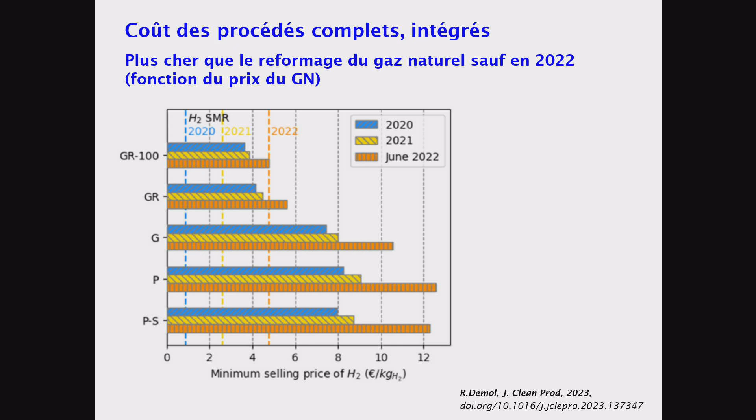Merci pour la présentation. Déjà, sur l'analyse de cycle de vie, vous avez montré le Global Warming Potential, surtout vous avez parlé de ça. Et vous avez une idée pourquoi là, vous avez un effet positif, c'est pour la 5e configuration, c'est ça?

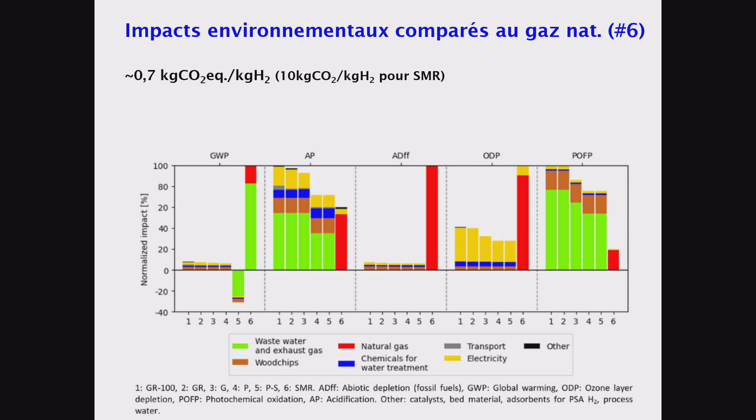Négatif ou positif? Ça dépend de quel point de vue. Donc du coup, c'est surtout l'émission de CO2. Quand vous séquestrez du carbone avec le biochar, parce que vous l'enfouissez, il retourne, il est mis dans un stock, un puits de carbone. Vous pouvez considérer que vous êtes négatif en carbone sur l'ensemble de la chaîne, puisque vous avez moins de carbone qui sort que de carbone qui rentre.

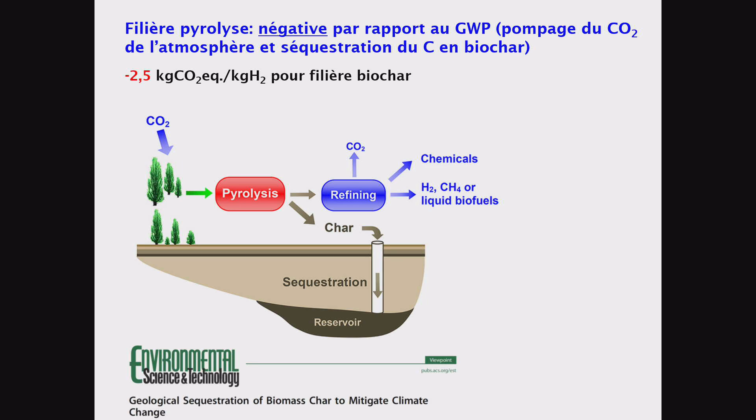Très bien, mais écoutez, merci beaucoup.

Je vais déjà vous remercier pour être présents aujourd'hui avec nous. Je vais avoir le plaisir de vous présenter, avec Mathieu Villani ici présent de chez Khimod, le projet GOHYAVE, qui a pour but de produire de l'hydrogène à partir de déchets.

C'est dans cette direction ou dans l'autre? Très bien. Nerius Invest en quelques mots. Ah oui, là c'est mieux comme ça. Nerius Invest en quelques mots.

Donc notre ambition, c'est de contribuer à la décarbonation du futur, de l'industrie et de la mobilité en particulier. Notre métier, c'est développeur, intégrateur, financeur et constructeur de projets à impact environnemental positif, et en particulier la quasi-totalité de nos projets sont des projets d'énergie renouvelable.

La société est née en 2019 avec des projets en Guyane française. Elle y continue certains de ses projets, elle en développe d'autres en France et à l'international également. On est une quinzaine de personnes.

Vous voyez des petites images en dessous de certains de nos projets en sylviculture innovante, en distribution d'hydrogène, cogénération de biogaz de décharge, et le fameux projet GOHYAVE qui s'inscrit dans la thématique du jour, avec la production d'hydrogène circulaire via pyrolyse, circulaire puisqu'on part de déchets.

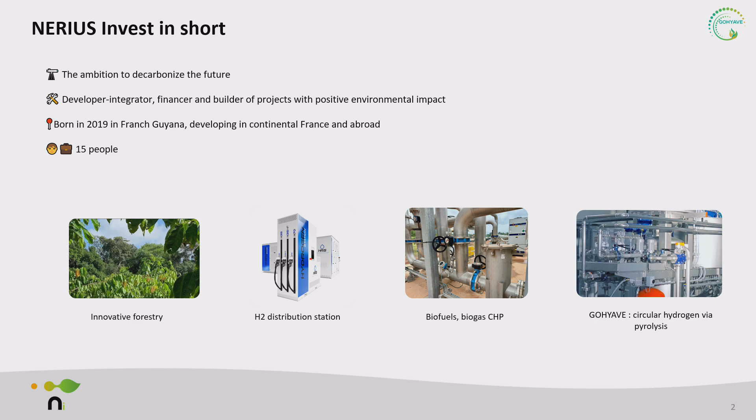La problématique numéro 1 qu'on adresse, c'est la décarbonation de la mobilité. Vous voyez là un graphique du CEA qui montre les prédictions en termes d'usage d'hydrogène pour la mobilité, que ce soit sous forme de molécules pures ou intégrées par la suite dans du SAF par exemple ou d'autres types d'e-carburants. Vous voyez quelques chiffres du marché, et un point intéressant à soulever, c'est que la bulle hydrogène est ce qu'elle est, je pense que les gens dans la salle connaissent un peu le statut.

Aujourd'hui, il reste des usages mobilité, y compris mobilité terrestre, qu'on peut considérer comme hard to abate, et pour lesquels l'hydrogène est une bonne option. La mobilité lourde, intensive, et d'autres types de véhicules, comme des véhicules de chantier, qui ont des besoins en puissance tellement forts, parce qu'ils auront des grues intégrées, plusieurs roues motrices, ça peut dépasser le mégawatt, que l'électrification n'est pas une option. Donc l'hydrogène a encore de l'avenir sur certains marchés de niche.

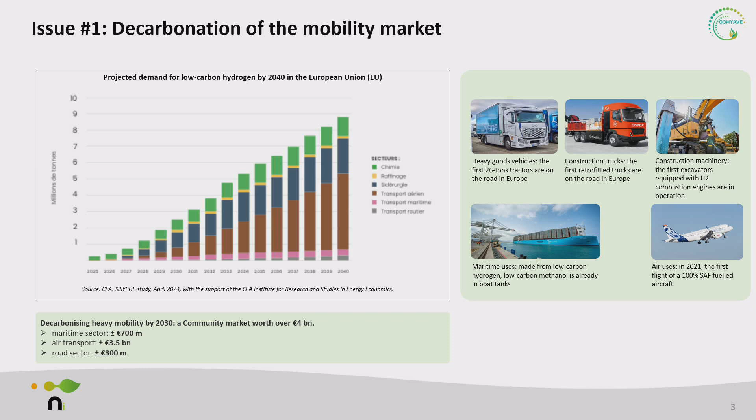La deuxième problématique qu'on adresse, c'est la problématique des déchets. Vous voyez ici l'illustration de plusieurs intrants que l'on vise à terme. Pour l'instant, sur cette première version du projet industriel, on se focalise sur les pneus, qui aujourd'hui sont souvent, comme les autres déchets, envoyés dans des pays à faible niveau de protection environnementale pour être brûlés, par exemple dans les cimenteries. L'idée, c'est de développer un service au territoire et un écosystème local, de faire de l'écologie industrielle territoriale au service du territoire et de valoriser ces déchets.

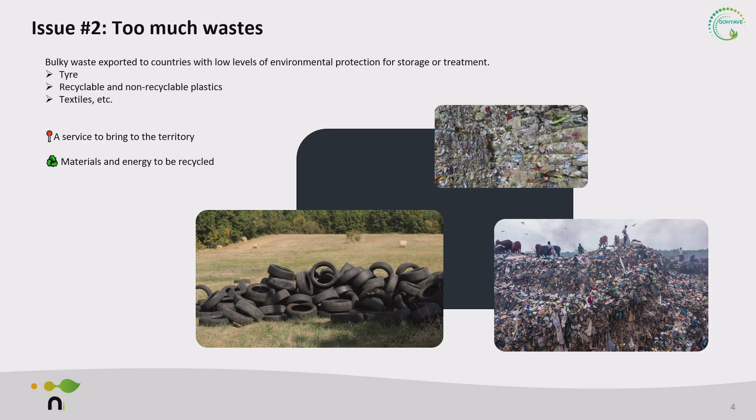La première étape, c'est la préparation de la charge, avec un enjeu sur le déferraillage du pneu, le broyage du pneu, et la granulométrie, parce qu'un écart de granulométrie peut générer un gros écart dans le temps de contact dans le four et donc dans les propriétés du syngas.

Ensuite, on a un bloc de pyrolyse haute température. On ne va pas générer des huiles, on va générer du syngaz, du gaz de synthèse, riche en hydrogène, qui va contenir aussi du CO2, du CO, du méthane, des goudrons, des suies, tous les composés indésirables qui sont inévitables.

Un coproduit, c'est le char ou le carbone black, qui pour l'instant n'a pas le qualificatif de carbone black type raffinerie, c'est du recyclé, mais qui trouve des débouchés dans des secteurs comme le plastique, le rubber, ou l'industrie du verre. Donc qui peut être valorisé en coproduit également.

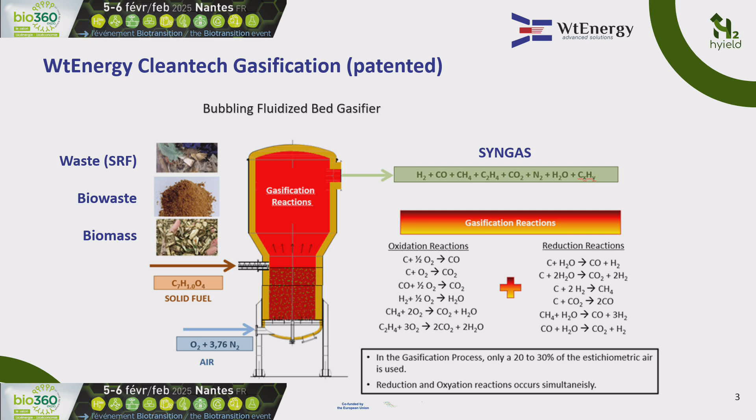We work normally with gasification technology. This is what I'm mentioning here. This is a bubbling fluidized bed gasifier, the air bubbling fluid bed gasifier. Normally we use it for thermal applications. I'm not going to explain too much here, but basically what we do is convert a solid into a gas, and there are so many applications.

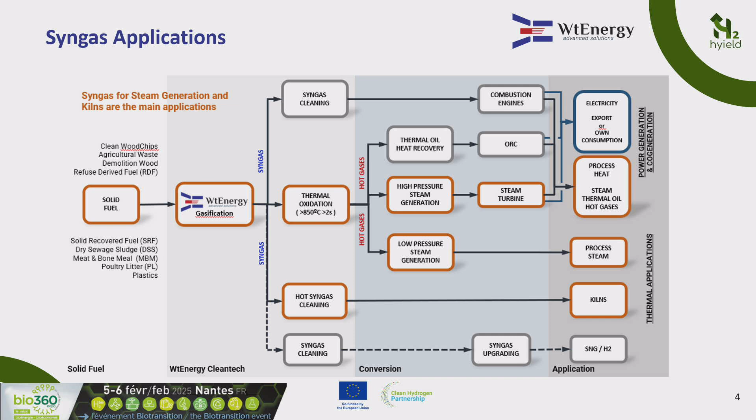And the last line is syngas cleaning, upgrading, and synthetic natural gas and hydrogen, which we are talking about here today. It's dotted lines because we have not really reached a commercial plant. But these are the experiences that we have with syngas for thermal applications and power generation. We already made gasification from wood chips to power generation at small scale, 1 megawatt and 2 megawatt electric. Then we switched to thermal applications, energy savings in industry using bio-waste or waste for steam production.

And the last three plants we have on the top include an 18 megawatt cogeneration plant in Switzerland. Now we're making one here in France, very close to here, 1 hour from here, which is a bio-waste to cogeneration plant also.

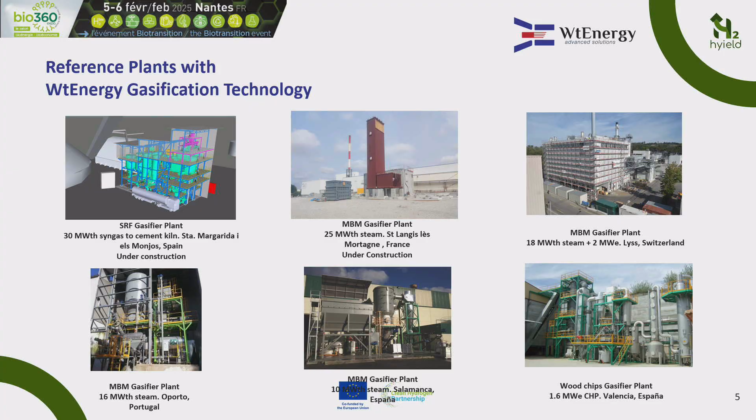And the last plant we see on the left is a cement plant in which we're going to replace 30 megawatt of syngas directly to the kiln. But as mentioned, this is the next step forward, going to green fuels from syngas.

For this, we created a consortium. There are several companies from Spain, France, Norway, and Germany. So we have big players here, okay? They decided to come with us to this project. We have companies like Cemex, which is one of our partners in my company. We have Veolia, H2Site, which is the membrane separator company.

This Horizon project was awarded 1.5 years ago. The target was to make hydrogen from bio-waste. So we adapted our technology in order to achieve that commitment. The big numbers are that we have to produce 400 tons of clean hydrogen. We have a very high efficiency on the conversion. I will explain a little bit why we have this good efficiency.

We have a very good integration of the heat from the processes, and also a very novel solution for the water gas shift and separation to reach a 99.97 purity of hydrogen and have less than €3 per kilogram of cost, considering biomass, which we are paying for, okay?

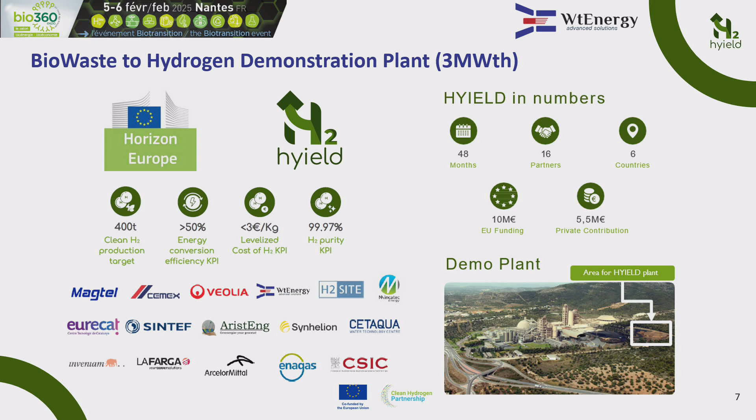It's a funding of 10 million euros. The total project is 15 million euros. We have 16 partners, exactly, from 6 countries. And we have a contribution of 5.5 million from private contribution from our companies.

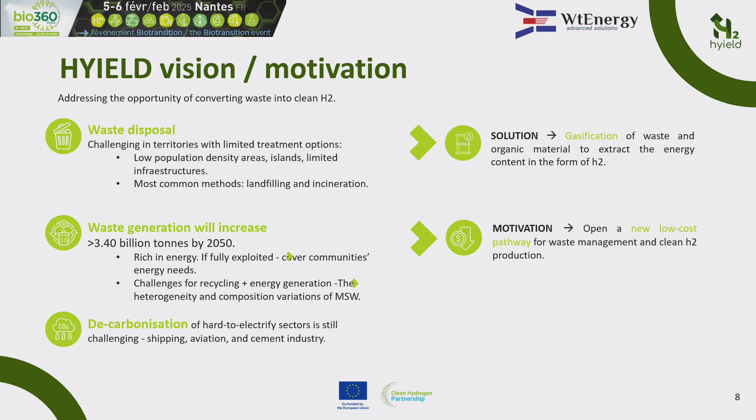The motivation is basically that the waste disposal gives some other alternative to the waste. There's a very high potential, more than 3.4 billion tons by 2050. We have to decarbonize. We are producing this solution. And basically the motivation is to make this low-cost pathway for hydrogen in the industry. I'll come back, sorry.

Yes, okay. Key parts. Feedstock flexibility. We see this as very important. You cannot consider making a project only for wood chips or a very standard material. You don't know what is going to happen in the next 15 years in the biomass or bio-waste market. So we have the flexibility of a very wide range of material with low heating values from 2 to 5 kilowatt hours per kilogram. We also developed the technology to handle complicated materials, high ash content, and complicated ash.

Low cost, this is very important. We have been in the world of gasification since 2003, and we know that if you don't make something that is really cost effective, you have no project. Scalable design: we are running this demonstration plant of 3 megawatt. The target is to have commercial plants starting from 10 megawatts up to 50 megawatts. We believe more in a local distribution of hydrogen, close to the consumers and also close to the source of biomass or bio-waste.

High purity, and a very improved high efficiency. We are producing over 160 kilograms of hydrogen per ton of dry biomass. This is a very, very high yield compared to the numbers explained a few minutes ago, about 80. And we try to use all the waste heat from the process and integrate it inside the system.

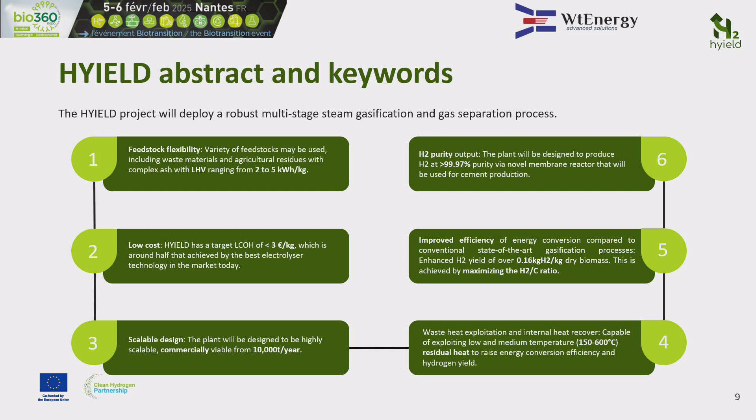This is a clear view of the consortium. I already talked about this, so let's go to the next page. This is the demonstration plant. The demonstration plant will be at a cement kiln. We needed a site, so the site selected was close to our offices, close to some partners, where CEMEX can integrate, and with some consumer of this hydrogen. It's not that I believe hydrogen is for thermal uses only, but at least we have a very nice site to have the plant developed.

So in the first part, the waste management will be in charge of Cetaqua and Veolia. Then we have the multi-stage gasification, which is our part, waste-to-energy advanced solutions. Then we have the membrane separation, which is H2Site. Then we have a very novel hydrogen storage system by Mincatec, and the use of the hydrogen in the cement industry will be by CEMEX.

Then we have in the Aristeng, Inveniam, SINTEF, working also in the management, software, process simulations, Magtel in this control system, and then the application of the hydrogen in other companies like CEMEX, Synhelion, Enagas, and ArcelorMittal.

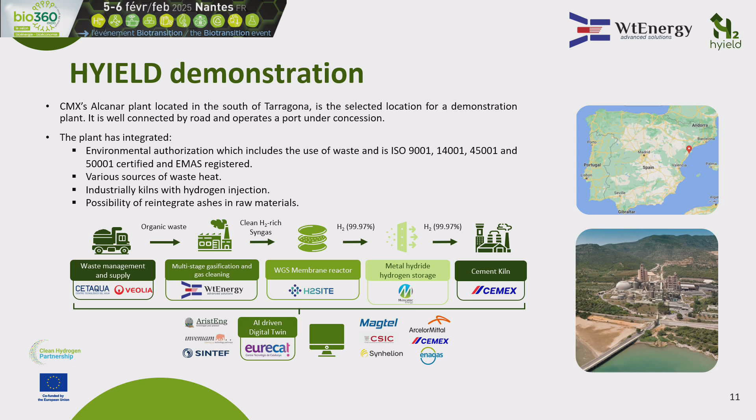So this is the process we came out with, okay? It's already under patent. We came out with the idea to work with a low temperature gasification with steam and oxygen. The target was not to convert as much carbon as possible to CO2. Once you convert to CO2, that carbon is dead. It means that it will not give you more hydrogen.

Then we go with a plasma reactor. So we are not doing POX, we're not doing partial oxidation. If we do partial oxidation, we're losing the potential of producing more hydrogen from biogenic carbon. So in this stage, we convert tars and hydrocarbons to CO, CO2, hydrogen and steam.

And then we have this novel multi-stage heat recovery in which we use all the heat that was introduced by the plasma in order to produce all the heat that we need to produce the steam and also preheat the gases to the process. Downstream, we need the scrubber and the cleaning. As they already mentioned, it's very important to have a very good gas before you go to any catalyzer, okay?

So in the first two stages, we don't have any catalyst, so it allows you to have any type of sulfur content, chlorine content, or contaminants in the syngas. And then we make a gas cleaning at a low temperature. This low temperature washing is a wet and dry system. At the end, we have an activated carbon filter as the last safeguard.

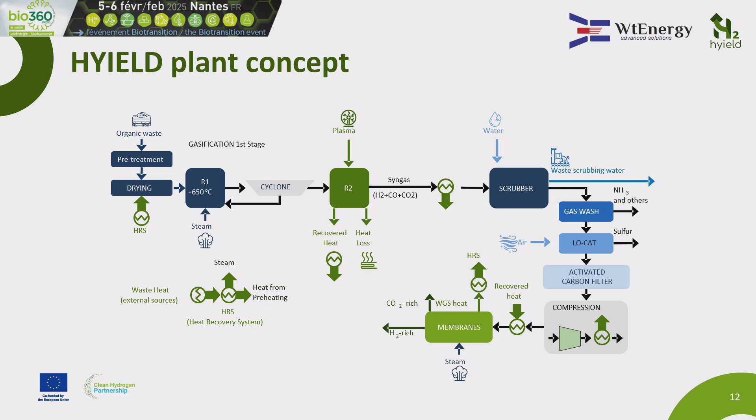So, just to explain a little bit about the project. First, we go with this methodology. Step one is the TRL 5, 6 testing. We're making this at the CSIC facilities. Then we make the development, which is producing this digital twin, working on the feedstock, looking for different bio wastes at the source. And we are now in stage 2, where we're making the detail engineering, manufacturing, installation.

The demonstration will be done starting February next year, and will last for 1 year. And then we're going to make this techno-economic analysis, benchmarking, and the scale up for the potential project in the European Union.

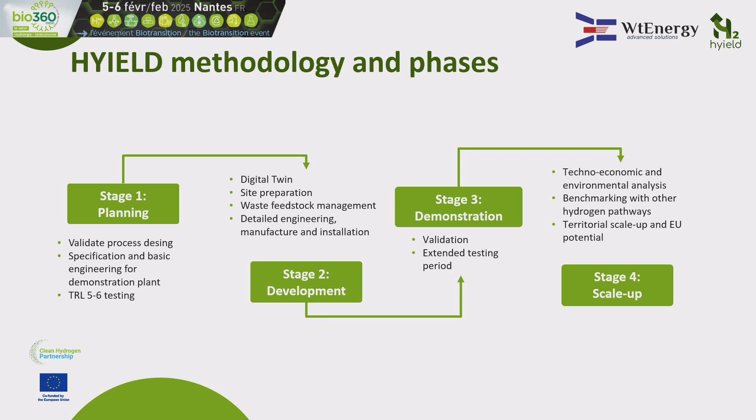Some challenges: the pretreatment of the waste. Basically, at this point, we only have to shred the waste. The moisture content is not so important. We make innovation number 2, which is the process design and optimization of the multi-stage. This is critical because it will give you a very high yield with the same amount of biomass.

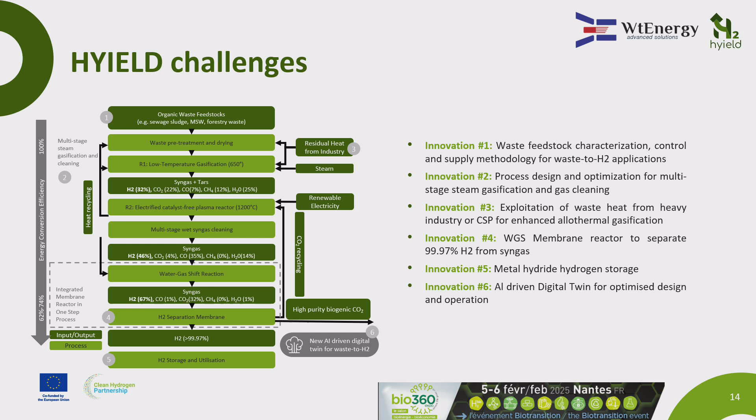Also very important was making the water gas shift in the same reactor as the membranes, to increase the separation. The 5th innovation is this metal hydride hydrogen storage, which allows you to store hydrogen in a solid form, so you reduce the risk of hydrogen in gas or liquid storage, and the digital twin, which will allow us to optimize the system for further installations.

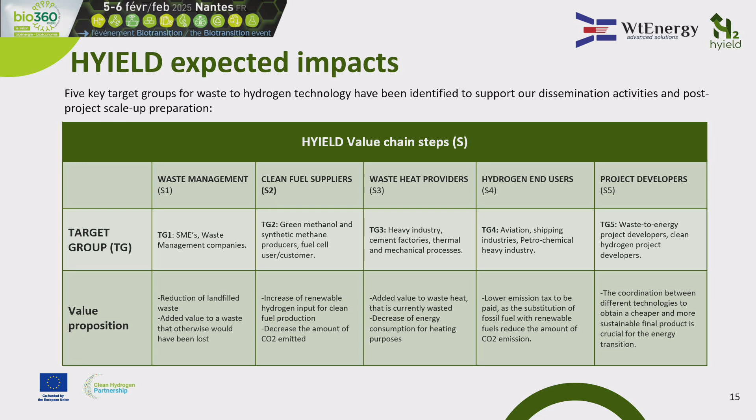Sorry. Well, that's next. It's too boring.

So, the potential, I think you already know. More than 300 million tons of waste in Europe allows 30 million tons of hydrogen to be produced. But what is important in this screen is basically to talk about the KPIs. Okay, we have a very high yield of hydrogen, and the operational costs are very low.

Okay, we are using some electricity, that's why we're using the plasma, but the idea is to have more than 500 kilograms per hour of waste, and produce 70,000 of hydrogen by 2040. These are all targets. Avoid more than 2,000 tons of CO2 per year per plant, using 4,000 tons of dry matter. Okay.

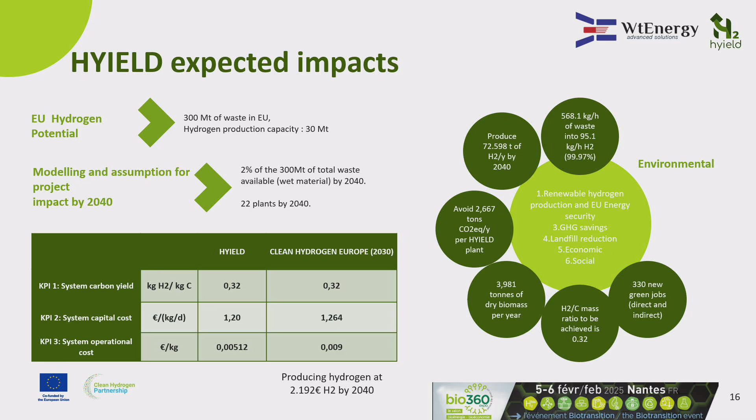The H2/C mass ratio to be achieved is 0.32, which is a high level, and it will create 300 new jobs in the deployment of this technology.

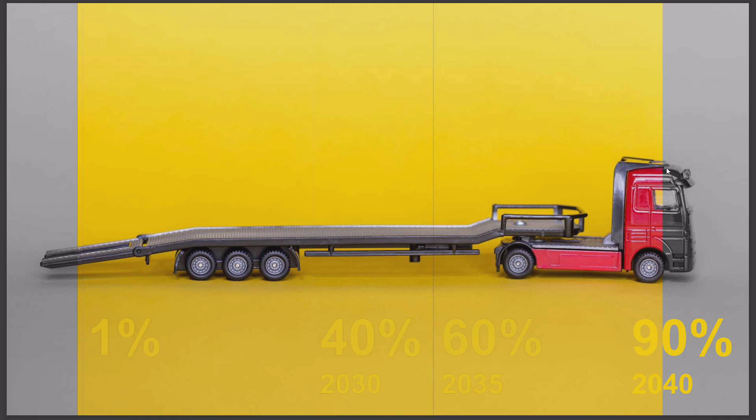So I'm here to talk about driving electrification using waste and hydrogen from waste. You may know that 145,000 heavy-duty vehicles were registered in 2024, and only 1,700 EV trucks were registered, which is not a lot at all in comparison. That's about 1% of all trucking. If we look at the EU targets that have been set, this is supposed to be 40% by 2030, 60% by 2035, and 90% by 2040. So we have a major challenge here.

The problem is that we have less than 200 high-powered chargers in the EU today, and to meet the 2030 targets we need 35,000 of them. But there are no grids to support this charging, there's a lack of capacity. And the renewable electricity that is supposed to power this, there are also a lot of questions around the rollout. A lot of wind projects are getting cancelled, FIDs abandoned, right, left and center.

At the same time, grid upgrades are taking 3 to 5 years if you want a local grid upgrade. A substation is 10 to 20 years. This was stated as a very big problem by Volvo's CEO at CES a few weeks ago, because they're not selling electric trucks because of this. So we have a major catch-22 situation: there's no charging, so you can't sell trucks, and without trucks on the road, nobody wants to invest in charging. As a result, we're risking completely crashing the electrification of heavy-duty traffic.

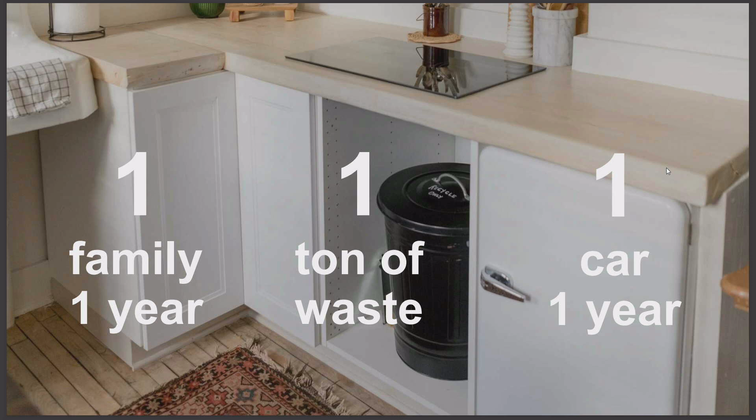There is, fortunately, a knight in shining armor here. And surprisingly, it sits under your sink. Because 1 ton of waste, which is the waste that one family generates in a year, can power an electric car for an entire year, or deliver 1,000 kilometers of truck travel.

And to make it competitive, it has to be delivered at fossil parity. What is fossil parity? It means to deliver the same effect, the same local availability, and the same cost as fossil fuels. Otherwise, it's going to be very difficult to upset an incumbent.

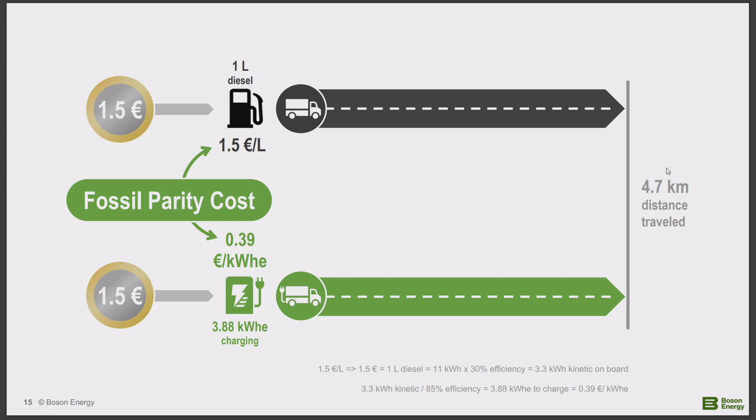Fossil parity on the cost side means if I have €1.50 and spend it on diesel, it takes me 4.7 kilometers. If I take the same €1.50 and spend it on 3.9 kilowatt hours of charging to go the same distance, that will have to cost 39 cents per kilowatt hour to have the same cost. And this is where we need to go.

To upset an incumbent, we argue we even have to deliver a green discount, because we have the fossil price as a benchmark. Up until recently, there was this idea we could charge a green premium and still make people switch to non-fossil alternatives. We don't believe in this. We believe in a green discount, to not just deliver carbon performance and no air pollution, but also deliver this cheaper than diesel. And within that green discount price, our unit economics need to be so good that we can fit the green profit to attract investors.

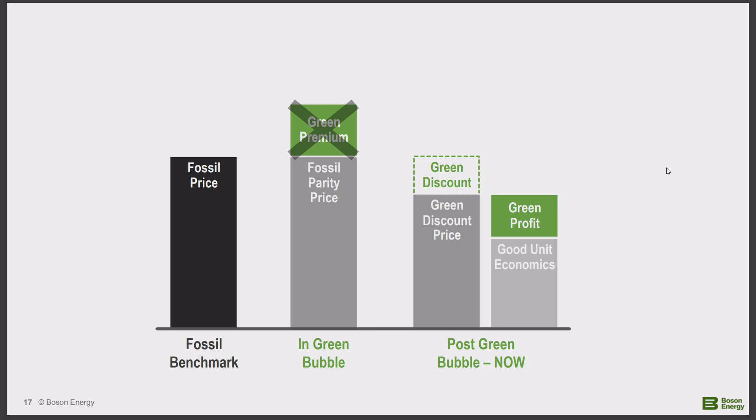So how do we do this then? We have to go back to science. Waste management and our energy systems for thousands of years have been based on burning stuff. We do that much more efficiently these days, but it's still pretty dirty and inefficient.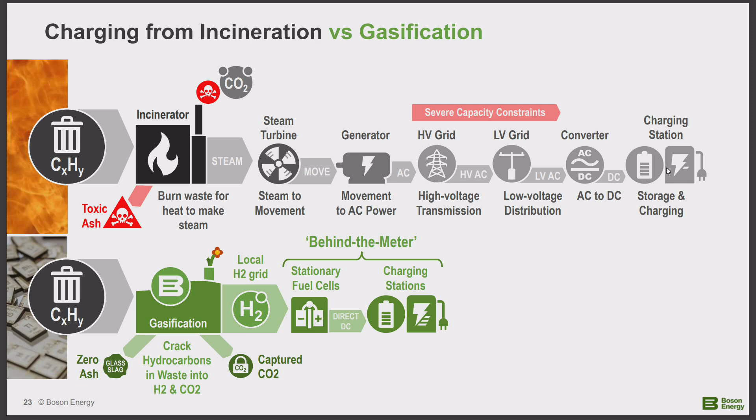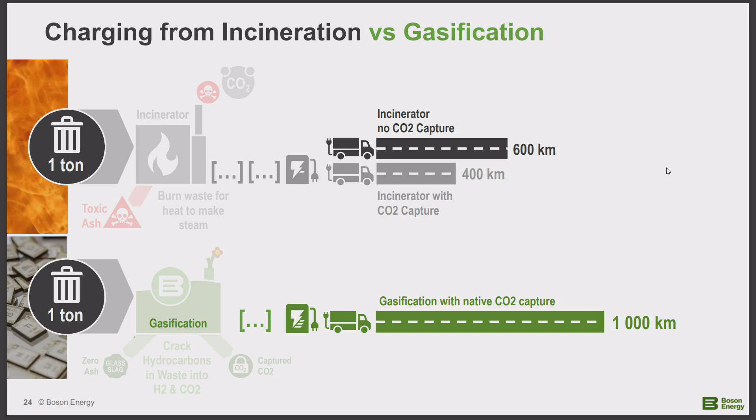Looking at the efficiency difference here: if I incinerate the waste with no carbon capture, I can get 600 kilometers. If I add carbon capture, which has high parasitic loads, incineration will only take me 400 kilometers. And gasification, as mentioned before, 1,000 kilometers with native carbon capture, which is a big difference here. That makes incineration the fax machine of waste management. And I don't have a fax on my desk - I don't know if you do.

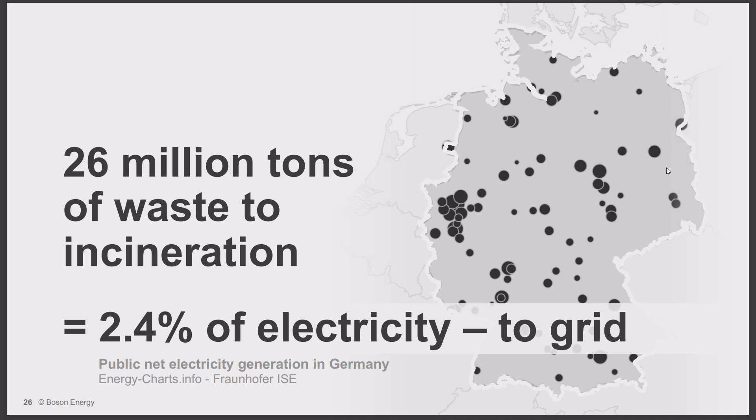If we take Germany as an example, incinerating 26 million tons of waste actually only produced 2.4% of the electricity in Germany, and it's fed into the grid as stupid AC, as we say - not able to contribute to charging. If we instead switch this over to gasification, we can electrify 60% of heavy-duty transport in Germany.

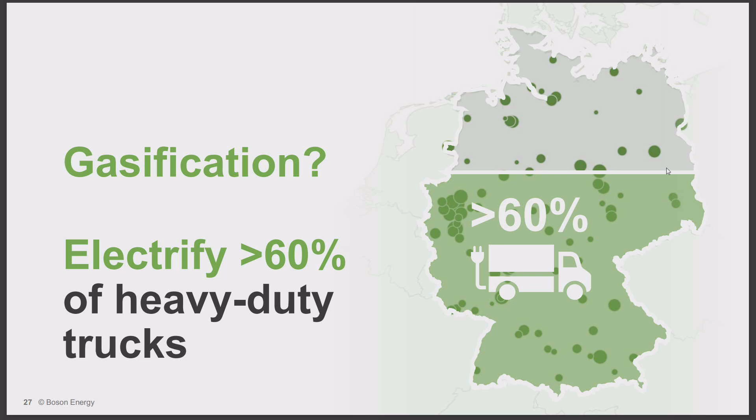And how is that possible? We need to do something called sector coupling, which means to efficiently and in unusual ways use the resources we have. An example of sector coupling is two actors buying a football club to make a TV series - creating things in new ways.

You have all seen these charts all over the internet, various complicated ways of generating all kinds of things, often from power to X, back to power again. The problem here is that these are very inefficient processes with many steps. They often require large-scale installations, and as we said, are also infrastructure dependent.

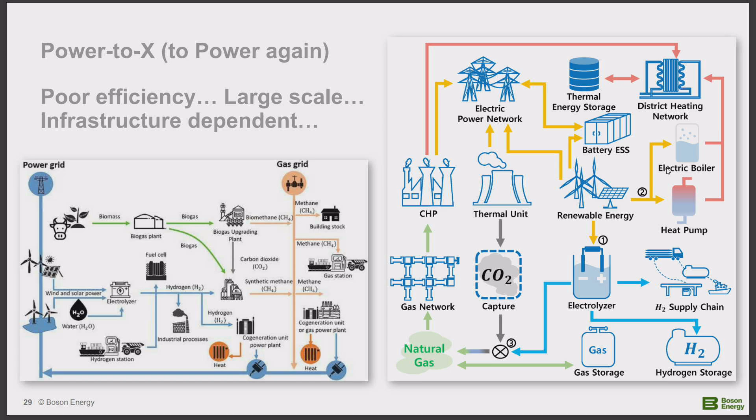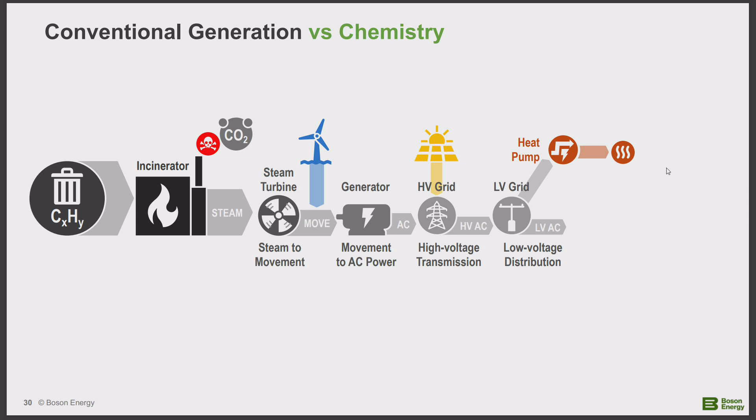Integrating incineration in this, or creating an energy system with incineration, we can add offshore wind, we can add large-scale solar into the system, but it all needs to go via the grid. You can have a heat pump to produce heat. That's the sector coupling that is going on. In some markets, the incinerator is connected to a district heating grid, but that's rather an exception.

In the gasification case, we have the fast charging. We can also produce local green heat from the stationary fuel cells, which means that we are not dependent on a large-scale district heating grid, but can rather do this on a site-by-site basis.

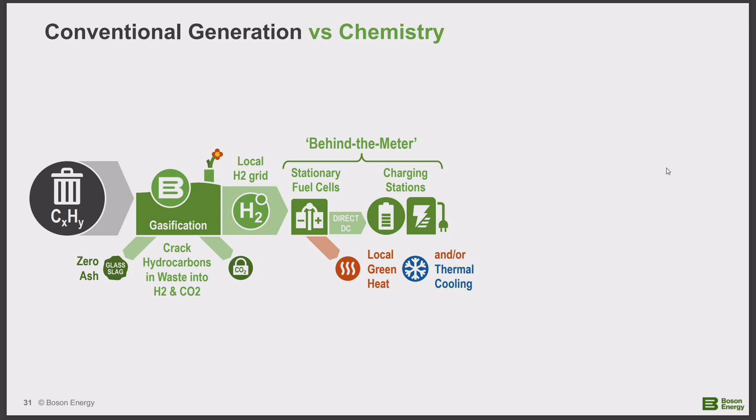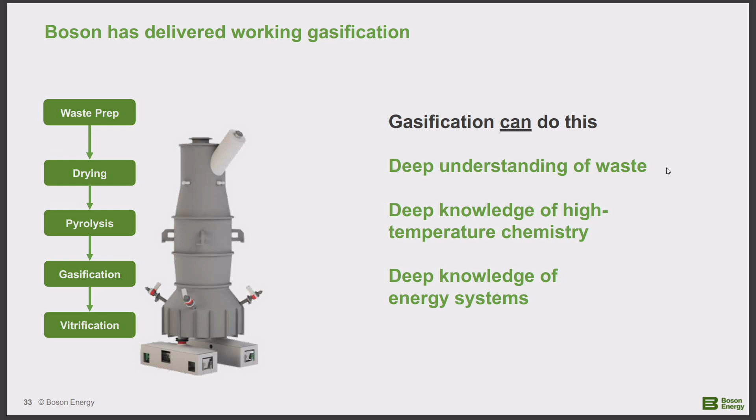So how did we bring this from science to technology? We have gone for gasification, as mentioned. Gasification is complicated, especially with a fuel source like municipal solid waste and RDF and other types of waste that constantly changes. But with a deep understanding of waste and knowledge of high temperature chemistry and of energy systems, this is doable.

The technology that we have developed has been developed with these changing waste characteristics in mind. So high tolerance for waste quality variations was one of the criteria. Simple gravity-driven process, very simple, allowing chemistry to do its thing, not forcing anything, and high energy conversion rate, carbon capture, of course, and zero ash.

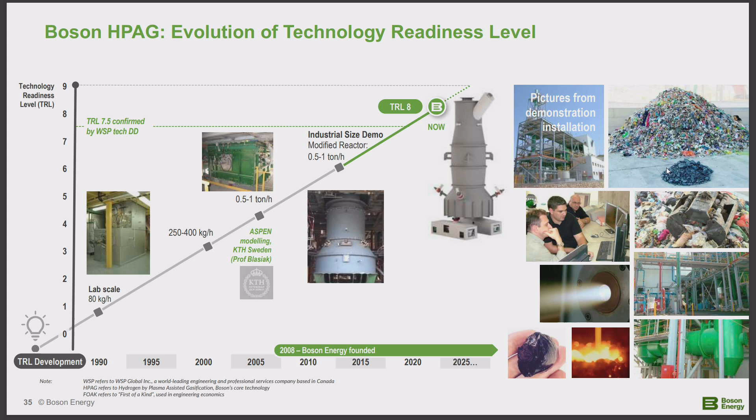We've developed this in a number of steps from lab scale, going up through sizes, and are now at the commercial size, which is 2 tons per hour for one reactor. Every system will have 3 reactors, 2 running and 1 on standby, which means that we will run at 100 tons per day for a standard system.

How do we build the complete system here and the rollout? We do that through partnerships. There are many companies who try to develop everything. We have a different approach. We try to reinvent as little as possible in our systems. We focus on the core reactor system, and we work with partners for all upstream waste handling, which is existing commercial technology. On the downstream, all the systems are also commercially available technologies, converting the syngas into hydrogen and captured CO2 and onto the fast charging. These are delivered by global technology partners and basically gives us unlimited capacity to scale from day one.

We have a 300 plant rollout schedule together with Siemens AG in place, which is our partner.

We have a number of projects. We have city solution and port projects in development. The city solutions, as I mentioned, 100 tons of waste per day, which translates into 36,000 tons per year, not per day, typo here. And the port project on the right is to deliver charging and shore power for ships, and also green methanol for the local chemical industry.

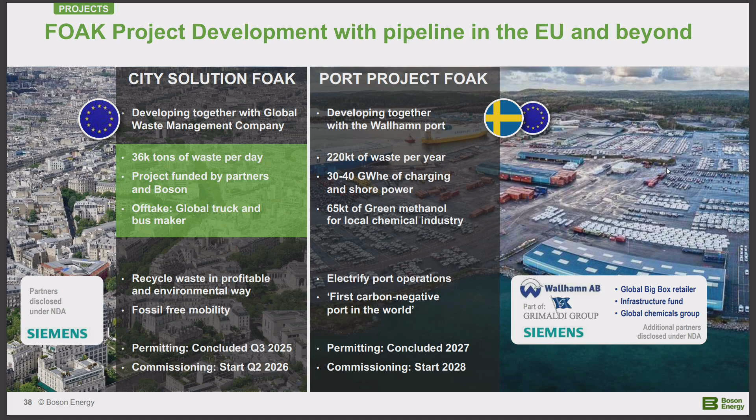And these are some of the projects that we have that we are currently developing, and our pipeline is brimful. There's a lot of interest for this approach. Thank you.

So the core reactor system produces syngas. Then there's a tar cracking step, and then there's a water gas shift to boost the hydrogen content. And then we're looking at a few different options. PSA is one option. There are some membrane options as well.

So, but in your demo project, or I don't know, I understand. Yeah, so the demonstration project was not focused on that. The demonstration project was focused on proving the syngas production. So the demonstration project that we ran at 1 ton per hour, that reactor, the syngas was then analyzed and then went into a boiler and the steam turbine.

No, I understand now. So for the concept to be realized, then I guess one big question is how pure is your syngas? Meaning how much sulfur, for instance, you will carry in the syngas, and how that will affect the separation of the different molecules in the syngas.

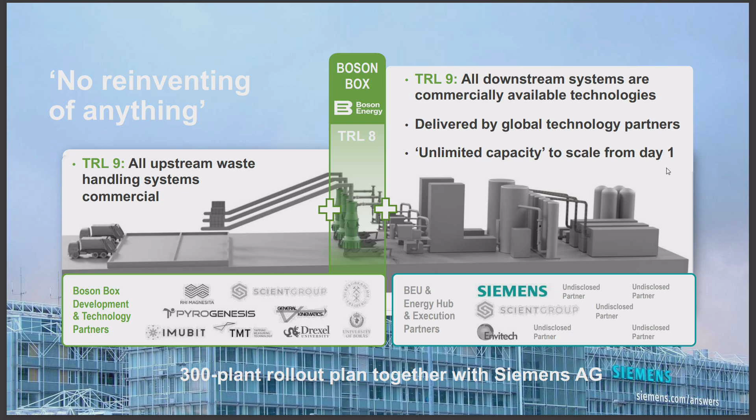Yeah, so the syngas that we produced has been analyzed, the composition, etc., and deemed suitable for this production. I will not go into the details of the quality of the syngas here, but it's a very clean syngas, and one of the reasons for that is the way the reactor is designed, the waste comes in on top.

It's a very slow process, so there's a slow temperature gradient where the drying happens first, then you go to the pyrolysis stage, then gasification, and then a vitrification stage, which means that the syngas generated at these stages will pass up through the drying stage. So the exit temperature is very low, which means that most of the things will be caught in the reactor on the way up. So that's how it is designed to handle the syngas quality.

If you compare that to a plasma, this is plasma assisted gasification. The plasma is at the bottom. If you have a plasma gasification and you dump room temperature waste into a big pool of plasma, you have a much quicker process, and there will be a lot more contaminants coming out with the syngas from the reactor.

There is a question just behind. Yes, if you allow me one question, I am quite curious about. In English, you have to.